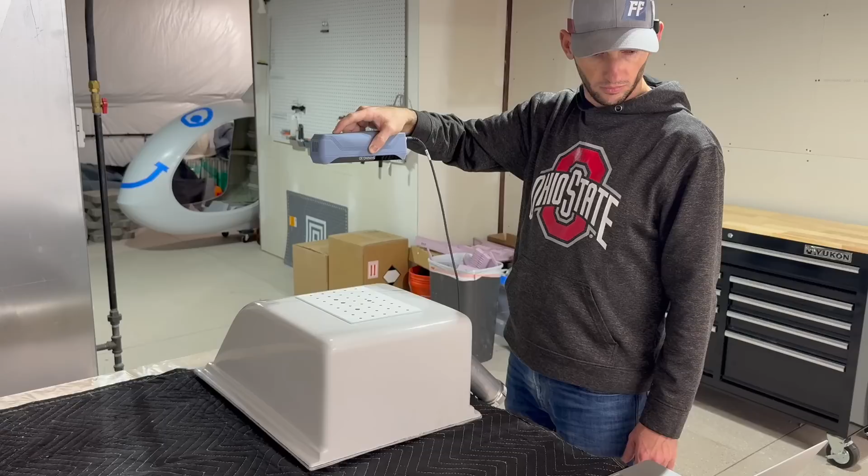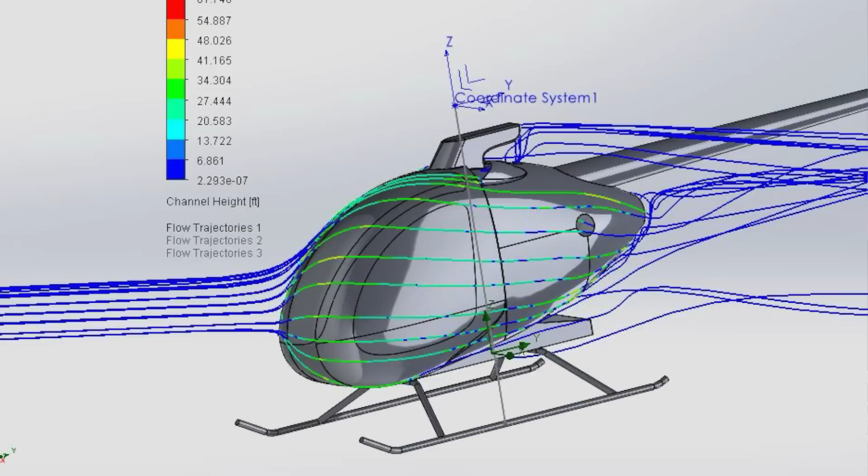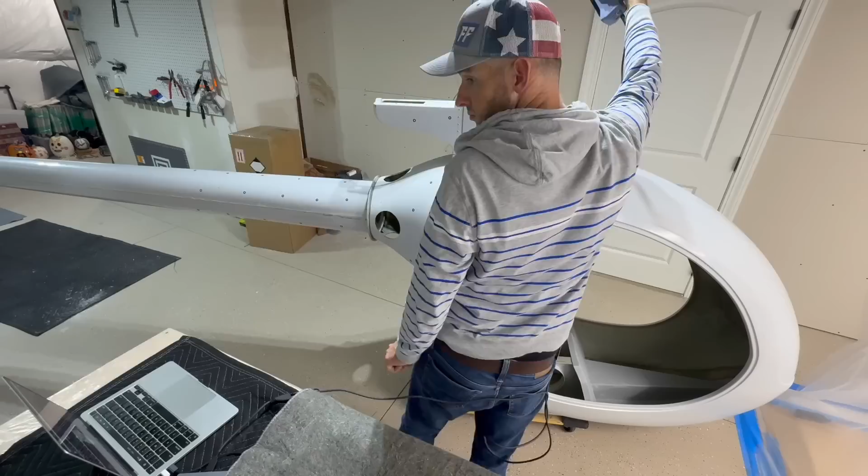Today's video is going to be a little bit different than you're used to. I have so many applications where I have parts in this physical world where I need to get them into CAD so I can do things like CFD or design new molds and parts for this helicopter. But until I had a 3D scanner, there was basically no way to do that. Now that I've had some experience with this scanner, I thought it would be extremely useful to put together a tutorial so you guys could see what it actually takes to use one of these things and how to go from the physical world through a point cloud and into CAD to design a part.

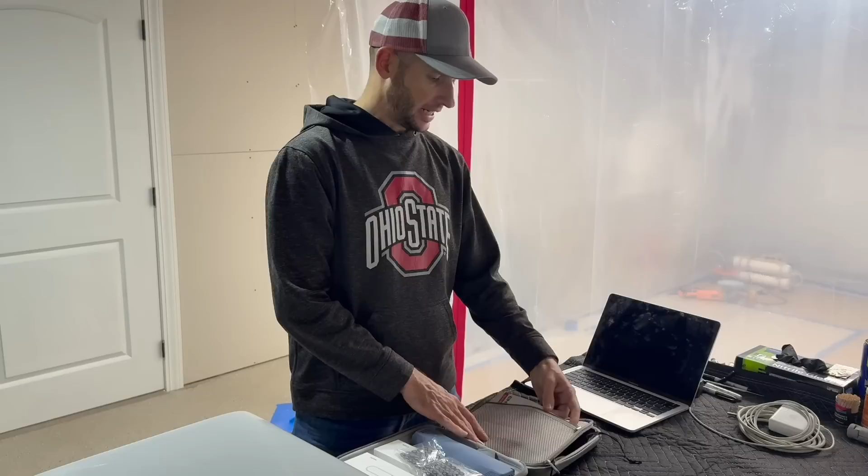The 3D scanner we're going to be using to get this part into CAD is called the Einstar by Shining 3D. It comes to you in a nice carrying case. Inside you get a power adapter, a cable to connect it to the computer and then to power, and obviously your scanner, which is here. Inside the pouch, you get some tracking dots, which is nice. There's a quick start guide as well to give you some basic pointers. And then behind here, we have a calibration plate, which we'll get into a little later.

This scanner uses infrared technology for scanning, so there's a couple advantages and disadvantages to that. It isn't quite as accurate as the laser type, though it does work in a full array of light because the infrared isn't as affected by other ambient light. So you can use it indoor and outdoor, which is a big plus. This particular scanner has raving reviews all over the internet for being able to scan larger objects, which is what we're doing here. It seems to be very user-friendly without needing a whole bunch of tracking dots and minimal setup. The software also seems to be the best for this grade of scanner. So that's basically the reasons why I chose it.

The disadvantage though is the software is computation heavy, so we're going to be using a MacBook Pro. It has the M1 chip. This is what they're calling the lower end of what you want. I think it has 16 gigs of RAM. You ideally would have like the M1 Pro chip or an M2 with 32 gigs of RAM, but so far this has done okay. I have run into a couple issues which we'll go over.

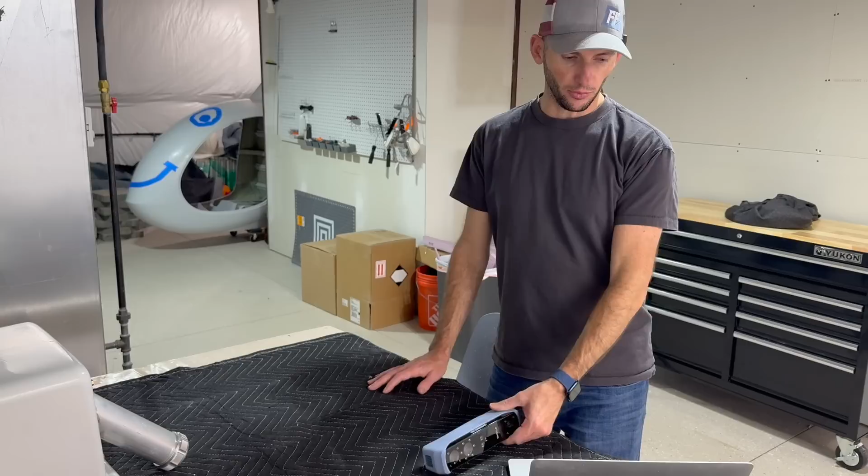For the most part we've done just fine. All right, so this is the Shining 3D software. When you pull it up, it shows you a couple things. The first is that the device is connected. If it is not connected, make sure you plug it in and then re-click the button and it should register that the device is there.

After that, it's going to check to see if your calibration is there. If the data is not there or if it's expired - I don't know what the actual timeline is, but I think it's like a week or so - if it hasn't been calibrated within that time, it'll give you an exclamation point, in which case you should probably go redo it again. In this case, it is calibrated, but I want to share with you guys that calibration process, so we're going to go into that.

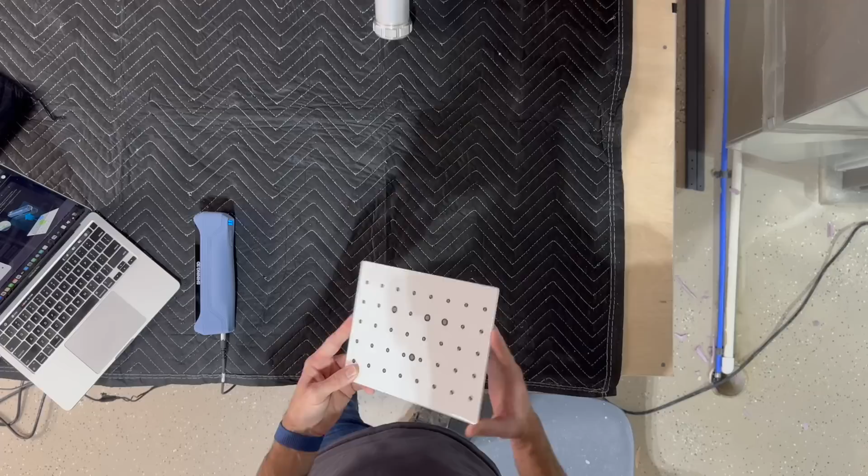What you're going to do is get your calibration plate out. You're going to orient it on a flat surface with the dots in the same manner that is displayed on the screen. I also found out that if you don't put this on a flat surface, weird things happen.

Something tells me I'm not doing this right. So if something isn't going right, make sure you are on a big flat surface.

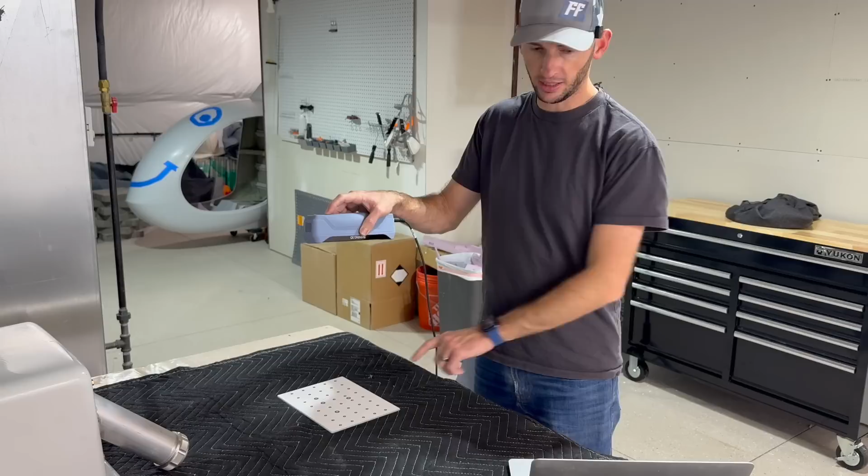After that, you pick up your scanner. It's going to step you through a few things. You're going to click the play button on your scanner and point it directly at the part straight up from the calibration plate. It should display a blue dot and a gray dot. You need to make sure that blue dot is in the gray dot and you get a green check mark. From there, the boxes on the right are your height.

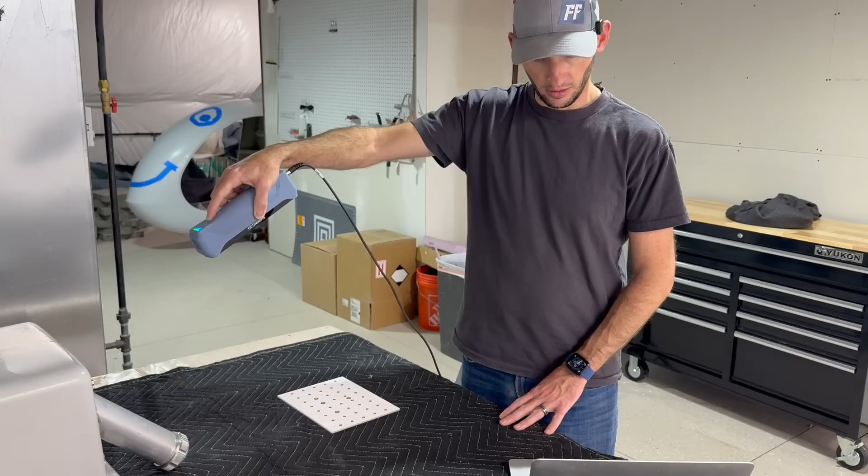So you'll move down and up until all of those boxes are checked. It doesn't matter the sequence that you do that. The next step is to do the same thing, but at a 30-degree angle tilted forward. Hit the play button again, get the circles lined up, and then raise and lower until all of those are green.

Do the same thing going back and to the right, and then finally to the left.

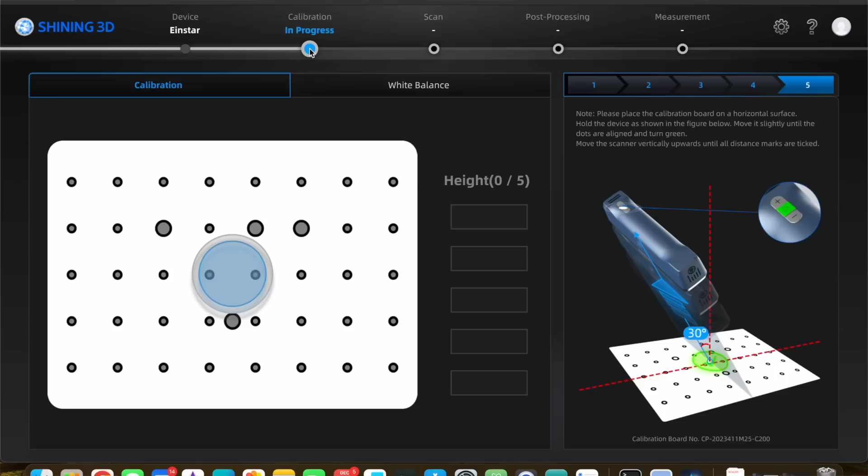After that, it will tell you it's been calibrated successfully, and you're going to check your white balance. White balance is just looking for one location, in the center and then at that height. Once that's done, you are good to go.

And that brings us to the actual project. So here we're going to click New Project Group. We're going to name this Aux Tank. Confirm. There was an error for storage, but I know we have plenty.

And in here we have a few options. You have portrait, which we're clearly not doing. We're doing an object - this is a medium or large object. It gives you some rough dimensions. Anything smaller than 200 by 200 by 200, they say do something smaller.

And then the mode of alignment - this is pretty important. This particular scanner does a really good job at just recognizing features. There's some things that can affect that, such as really shiny objects, which this kind of is. We're going to go just as is to see how this works, but we may have to make some changes in the future.

You can also put markers on here. We do not want to use markers because those are a pain. That's those other things you can do to make this more scannable. We're not looking for texture. And we don't want to use global markers, which would be something that you would put like on the ground around it or on a turntable or something of that sort. So right now we're just using features.

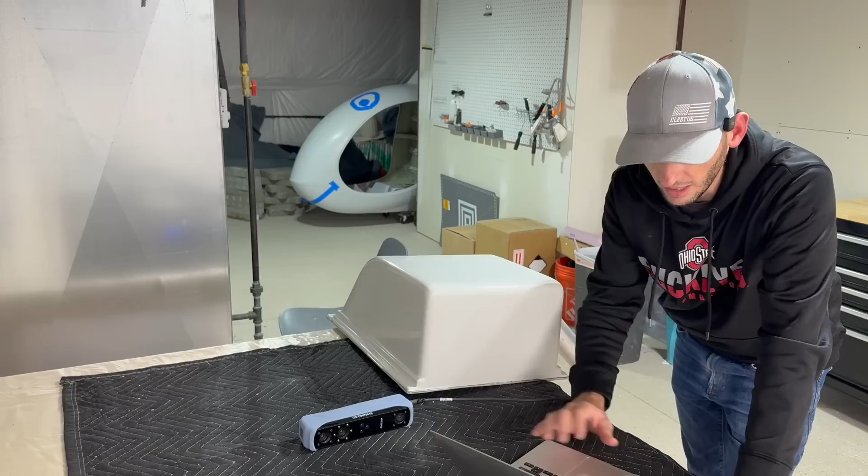Resolution, we're going to stick to 1 millimeter. You could go smaller, but I don't need that type of resolution for this. It's just going to mean that the file's bigger and it needs more computing. So we're just going to use 1 millimeter. Texture scan, we're not using the color cameras on this, so no texture scan either.

Confirm, it will open up your new project. And then let's talk through some of these. So you have brightness that controls the intensity of the IR lights, which ultimately scans your part.

If it's too bright, it'll blow the sensor out and you won't get good data. So lean on less brightness than more. Your working distance is next - this is how close or far the scanner is going to like to be away from your object. I'm going to leave that as default.

We have plane detection. This tries to detect a plane that's underneath your part. I prefer just to leave it off because we can detect a plane later. Then that is also coupled.

We'll jump down to auto cutting plane. That's going to attempt to get rid of any scan data below that plane. Once again, I'd just rather choose in post. I think it's better that way anyways.

We are going to turn data quality indicator on. This changes the color of the scan on the screen from red to green if it thinks that the data is good. So we're going to go ahead and use that as an aid. And then once again, you have this adjust point distance. From there, it's onto the part. So real quick about the part.

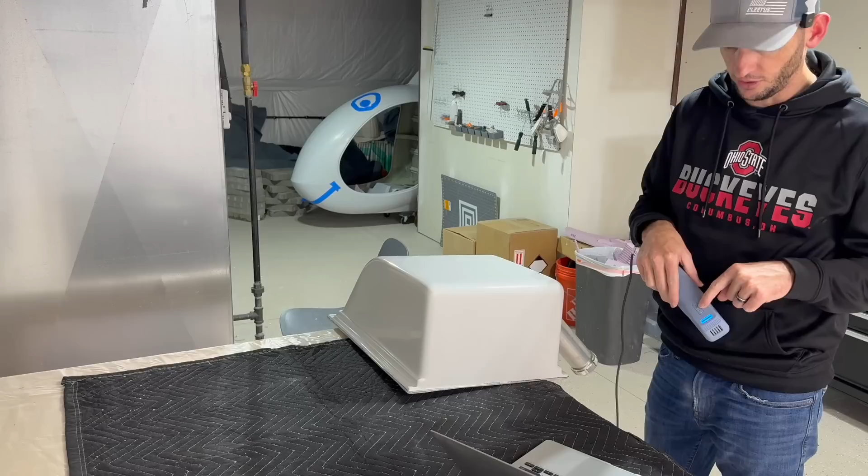So this is the scanner. There's a play button to start and stop your scan, and there's also a plus and minus. This does two things: one, it changes the intensity of your IR lights, so you can adjust that right on the scanner, and it also has a series of lights. So we'll get into this now.

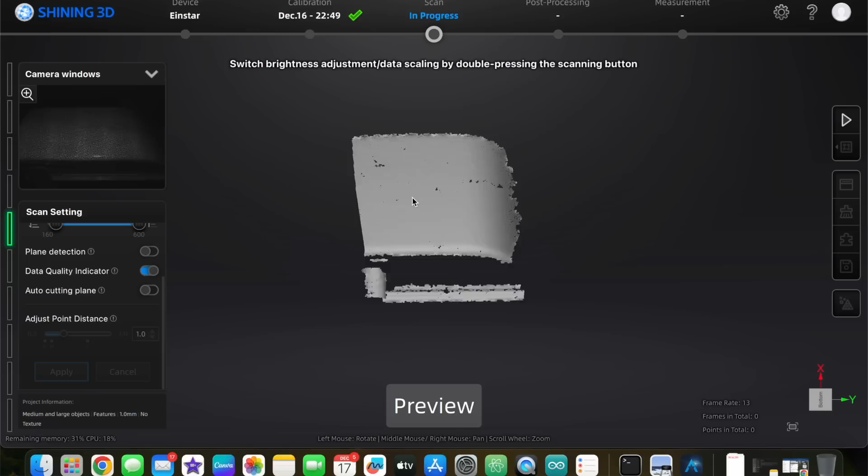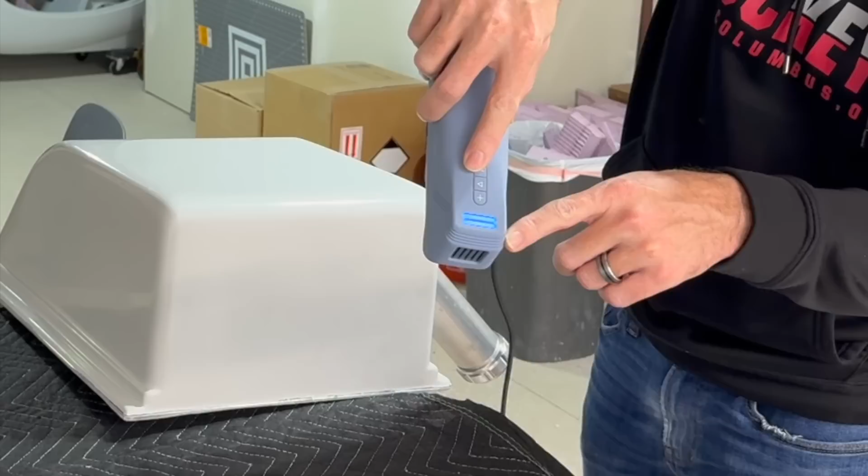The first time you click play, it goes into a preview. You can see on the left side of the screen there's a bar that goes from blue, green, then yellow and red. That is your scanning distance, and it gets mimicked again on this top light. If you're too close, it goes red, and as you get further away, it goes green and then eventually blue. So it's really nice that you can just stare at your scanner instead of having to stare at your screen, and all that data is there.

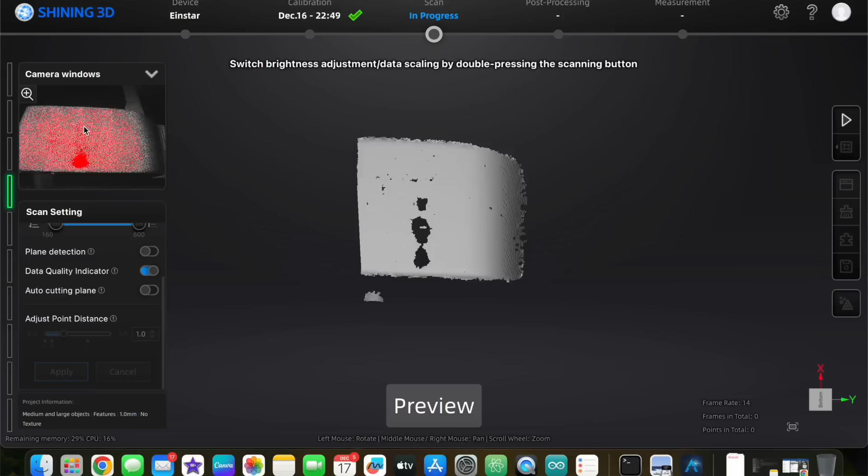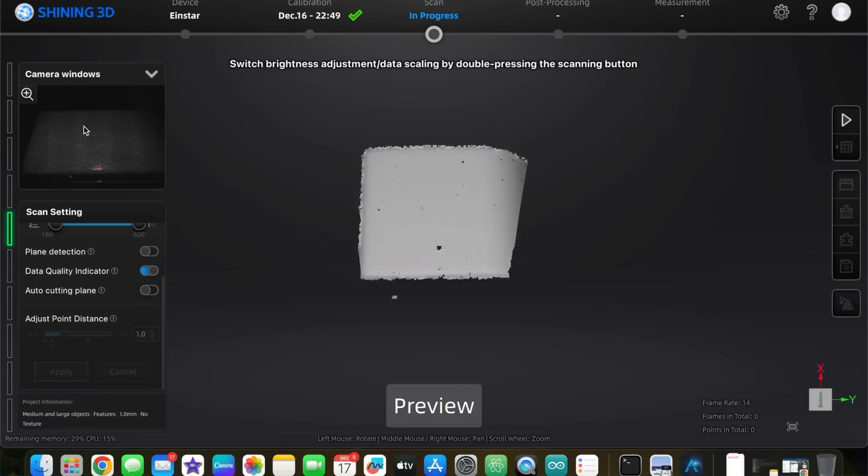The plus and minus button I mentioned controls the intensity of the light. I'm going to blow it out really quick so you can see what that looks like. This screen on the left is what I'm looking at. You can see all that red blowing out the sensor, and in the middle it just can't scan that surface because it's so blown out. So you take that back, and the further I dial this down, actually the better the scan gets, to a point, and then it gets a little frayed at the edges. So there's a happy balance—they say you want just a little bit of red on the screen, and I'm going to go with that.

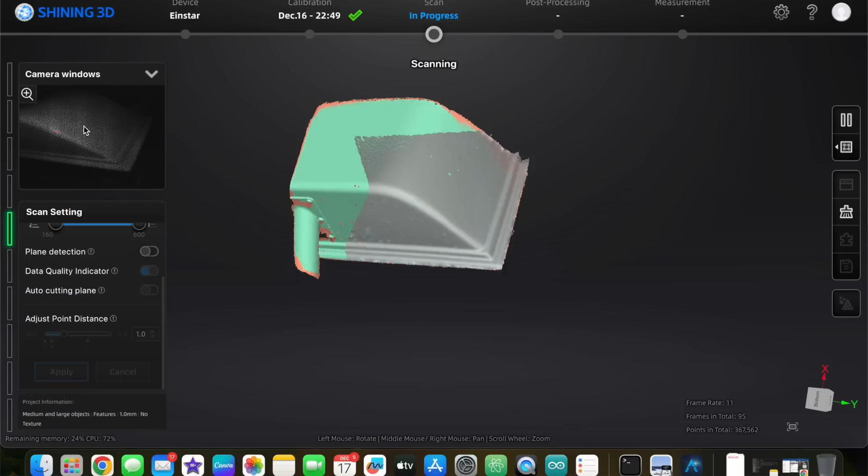That seems good. All that's left to do is hit play again, and we'll start scanning. So I'll go ahead and hit play. This is going to start to generate a scan. You can see it going from red to green the more it gets confident in that scan. You want to go slow, but you don't have to go too slow. The scanner does not like flat objects, so as long as that gray scanning area is recognizing some edges, everything should be okay.

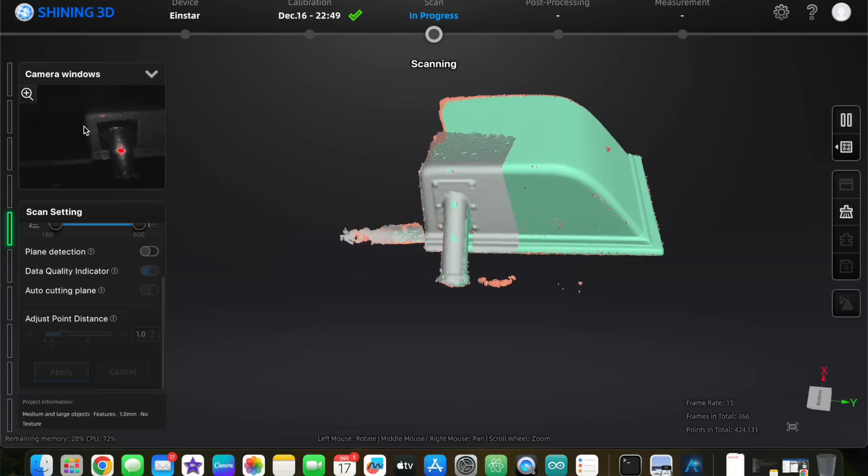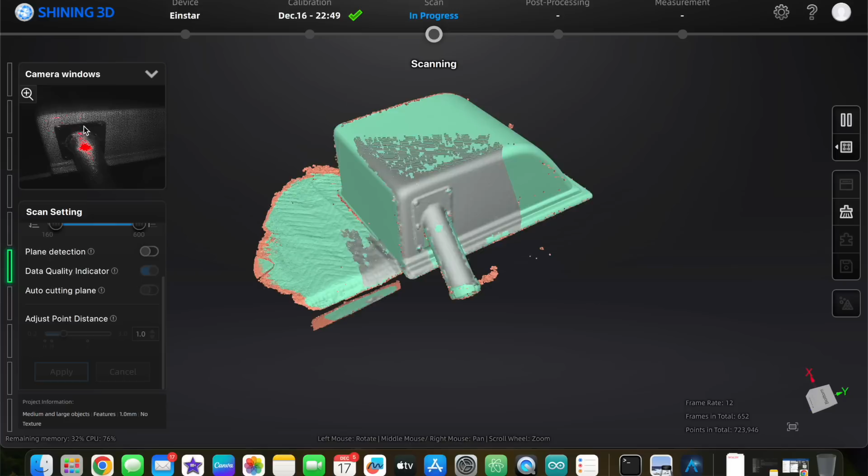When I was scanning the helicopter, it's such a big, flat, softly curved object, the tracking was just a disaster—it just could not keep up. So we're going to get the bulk of this part here, and then I'm going to show you how I plan to get some of the other sides, which is pretty trick and super nice. I'm just going back one more time. I wanted to make sure I get this corner back here, and we're going to come back and fill that in in a little bit.

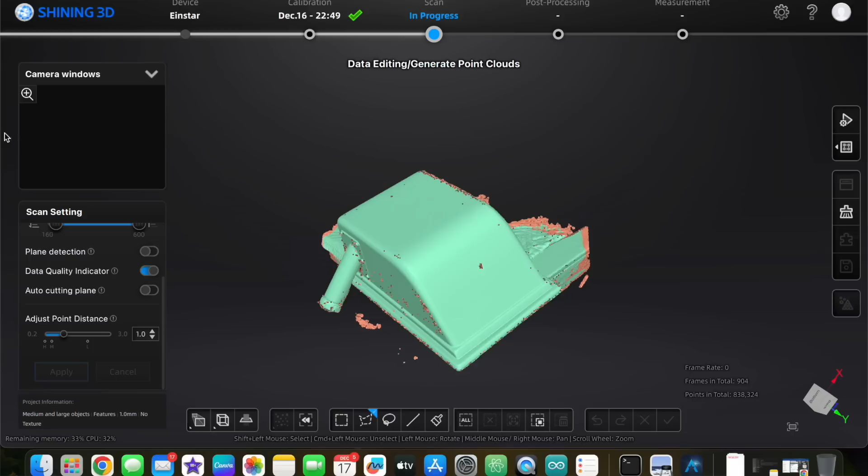So that's probably good enough, so I'm going to hit pause. This is the scan we have so far—pretty good, pretty happy with it, but there's a location, let's see if I can get you in there. It was caught by the shadow—see, we're missing all this data, and that's because I never got under there. It was a shadow, and it could never be seen.

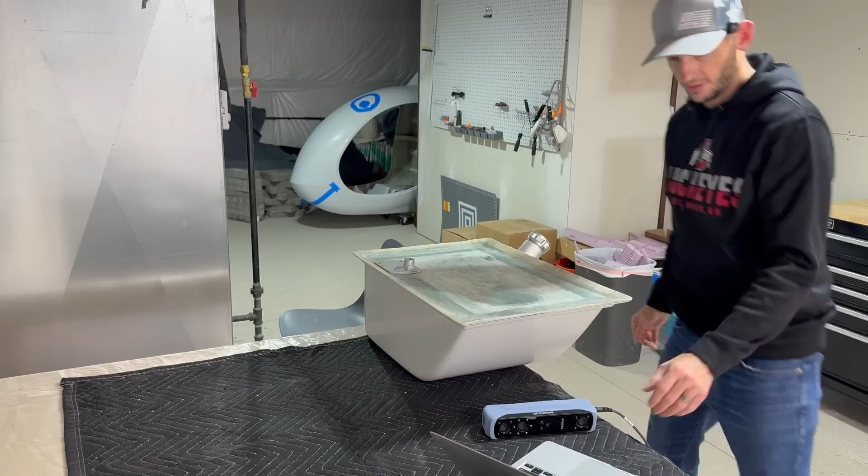So what we're going to do, to make this easy on ourselves, is actually just flip this whole thing over, and then use the software to recognize where the scan left off and start again. I'm going to hit play, and it's going to preview—it's going to look for the section that it's already scanned, and look at that, it's already picked up where it knows the geometry should be. This is going to allow us to comfortably scan the other side. So I'm going to hit play, and then rotate around to the top of this part.

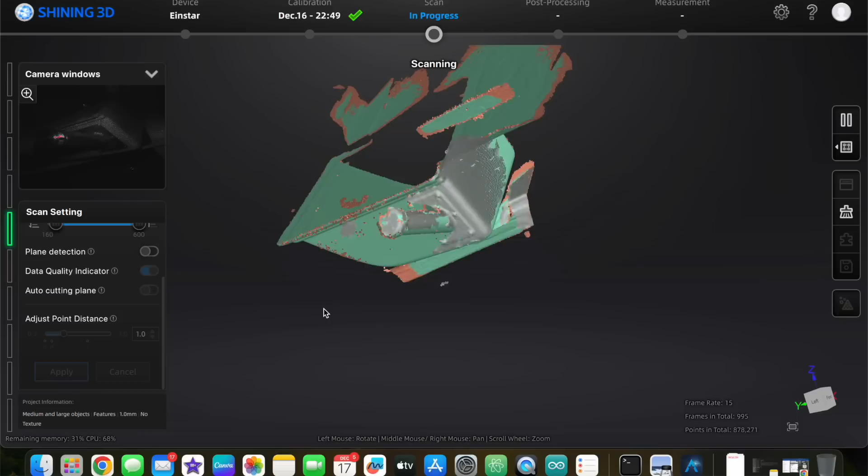And we'll hit pause again. And once you've finished scanning your part, there's a few tools you can use to edit the overall scan before it goes into post-processing. The first of which is just a rectangle tool. You use it by clicking Shift and then dragging with your mouse. As you can see, it creates a rectangle.

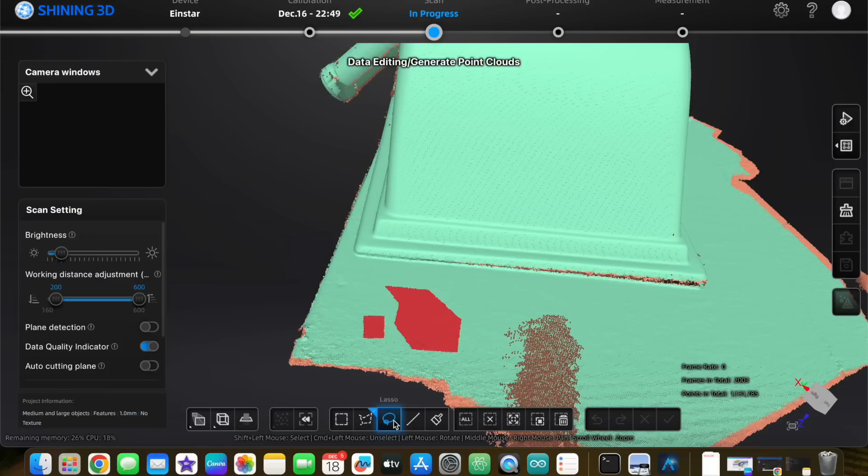The next is a polygon, so it makes as many lines as you click with your mouse. The third is a lasso tool. Once again, self-explanatory. And the final is a line tool. This actually creates a line and splits the whole part. You also have a paintbrush tool, and once again, you can just draw like you have a paintbrush.

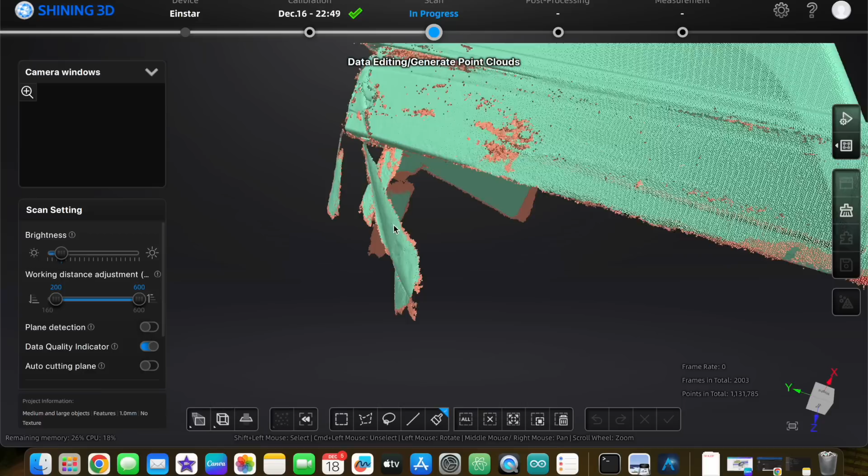It is important to note, though, that if you use any of these tools, it does not stop at the first surface. So you'll see here, I'll put a little shape on this surface that's sticking out, and then you can see now that that selection transfers all the way through to all the surfaces in that part.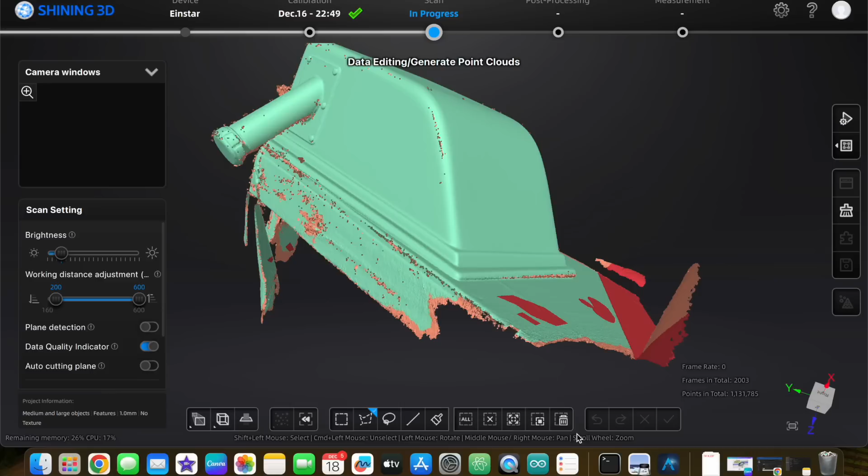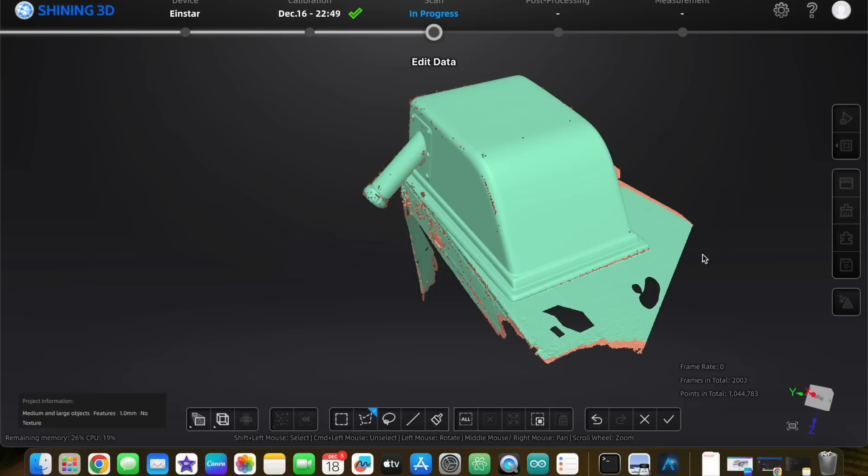From there, you have a few more helpful tools at your disposal. We'll go through each one individually, but we'll start with just delete, pretty self-explanatory. The next two you'll use together are called selected domain and invert. Selected domain will select anything that touches the original area that was previously selected. And then invert will then select anything that is outside of that domain. This is especially useful for deleting any of those stray objects or floating things in space.

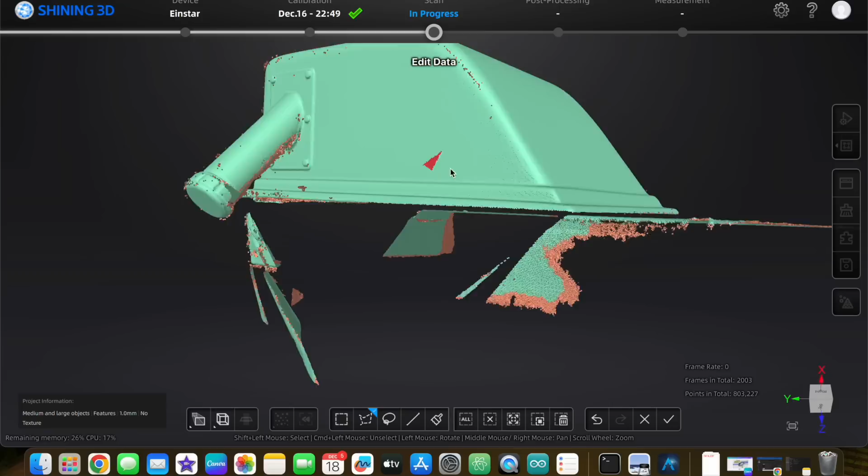From here on out, we'll be using the polygon tool. I'm just going to run around the entire perimeter of the part and get rid of any of that extra scan data from the table. And finally, we'll use, once again, the selected domain, invert, and then delete to get anything that is no longer touching my part. Clicking the check mark applies the edit, and then we'll wait for it to go into post-processing.

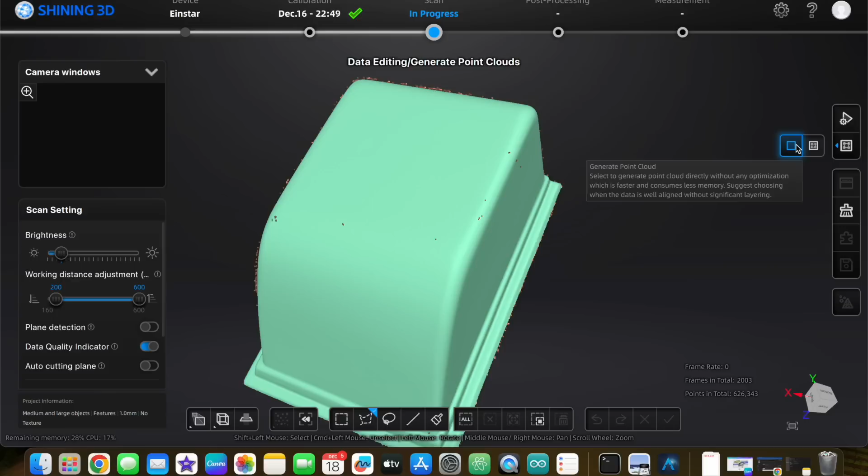And now you can start actually creating your mesh. There's two options here. One, it's just going to create a mesh, assuming that it's a pretty good scan. The second is if you have multiple projects that have been combined together, which apparently is a thing you can do, it will try and sort that out and create a mesh from all those individual projects. I have never been successful in combining projects, and so I don't know, maybe it's me, but I wouldn't suggest you try.

I've also gotten this warning every single time I've tried to do a scan. It's basically telling me there's not enough memory to do it and that I should go and rewind the process and make my scan data smaller. Long story short, it's worked every time. The wording here is also confusing. You can either confirm that it's not going to work, or you can continue that it's not going to work. So make sure you click continue.

This process could take a little while. It usually gets to 41% and just hangs. So just get up and leave for a little while and let it do what it's got to do. The couple of times that it has not worked for me, it's thrown an error code, but these were all on attempts that I was trying to combine projects. And since I've stopped trying to do that, everything has worked just fine.

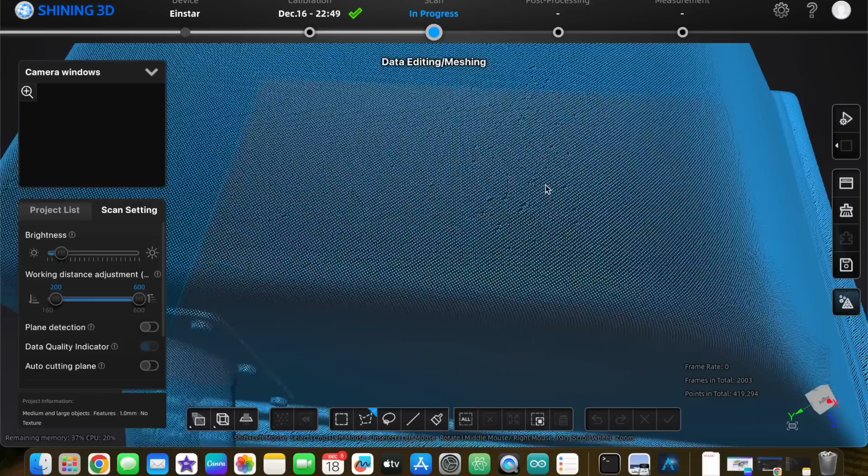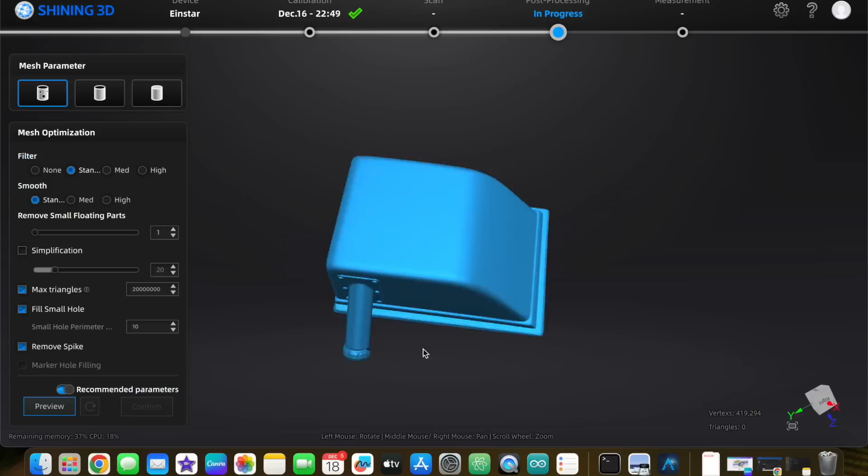And the last thing to do here is to mesh your model. And this gives you a few options. You can try to create an airtight or watertight model. You can do things like assigning the max triangle size. You can try to eliminate floating particles. Long story short, from what I've heard, it's best to just use the recommended settings. And for all of the projects that I have done, that's been what's worked the best. So we're going to do that and just stick with the recommended settings.

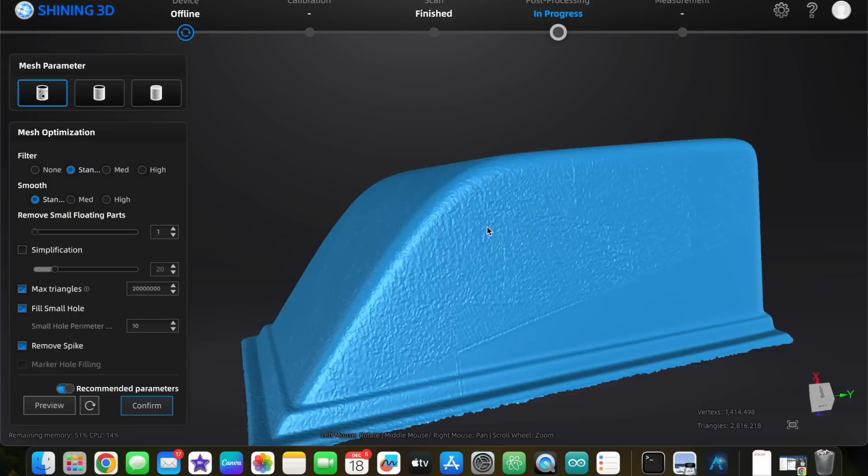The result ended up being a bit of a surprise for me. You can see that there's some noisy data and some hard lines and then some clean data. This was weird because with the helicopter scan I did, this never happened. The only thing I can come up with is that it was a shiny surface and the infrared lights just couldn't do a good job at measuring them.

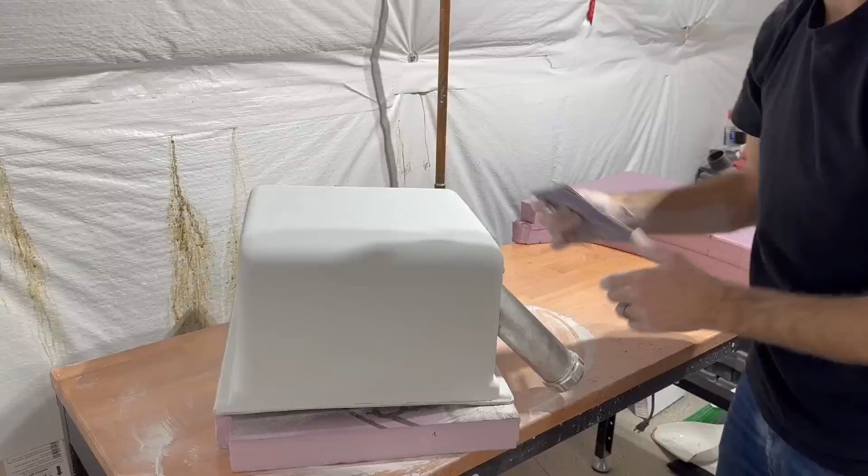The easiest way to test this theory was just to go sand the whole surface down. I'd have to do this anyways, so pretty good excuse. All right, so I've sanded all the surfaces back down to like a matte finish, nothing crazy. Let's test this theory out. I have no idea if it's going to work. We're about to find out.

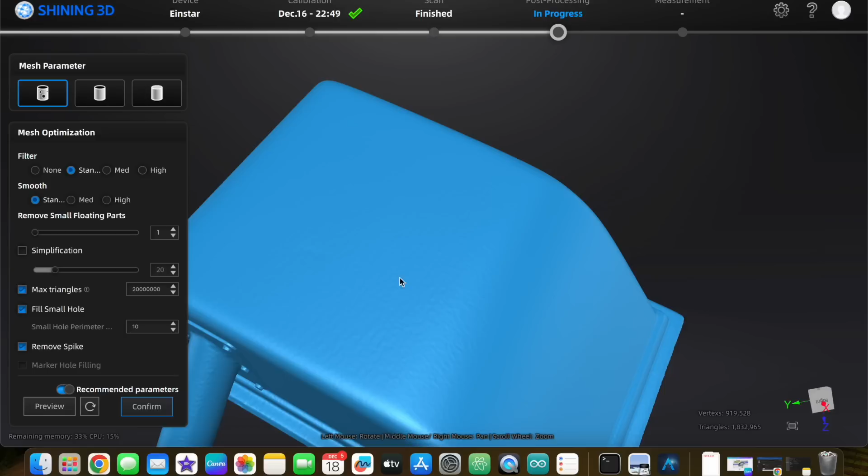And here we have it. The only thing I changed from the last scan to this one was the surface finish. You can see, obviously much better. There are some weird ripples going down the side. I can only assume that that might just be from the resolution that I selected, it being 1mm. This is plenty good for what I'm trying to do. I just needed a rough shape so that I can create a model. So for me, this is fine.

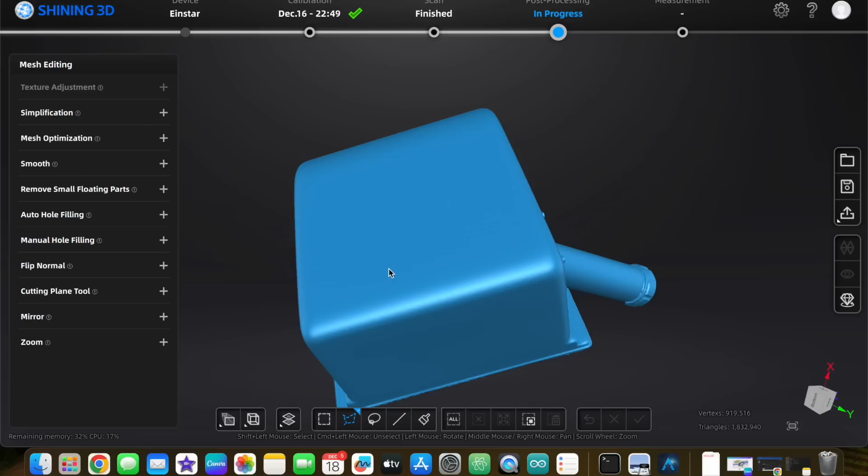And the last thing I want to share with you guys is simplification. This file starts out at almost 2 million polygons and nearly 90 megabytes of an STL file. That's just massive. Shoot for something around the 200,000-ish polygon number. That's going to be plenty sufficient for what you're trying to use, and it'll be much easier to work with in any of the CAD programs that you're using.

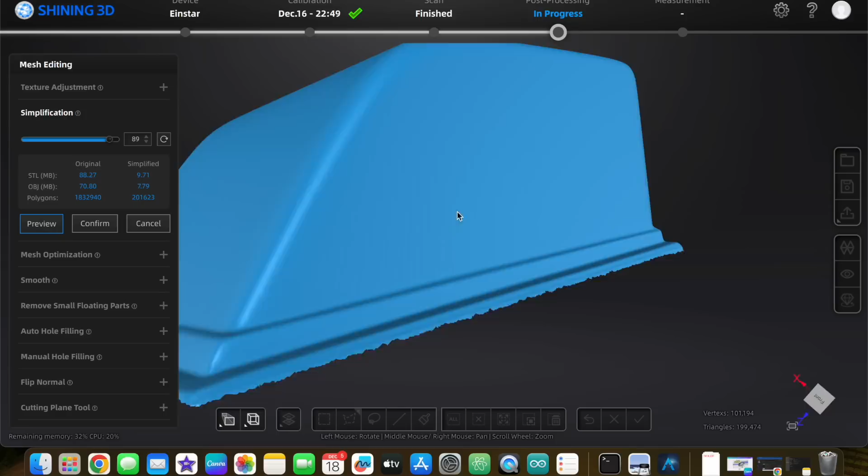And that's it. You have a perfectly scanned model. You can save it as an STL, a 3MF, a STEP, really anything that suits your CAD program most. And once you're done with that, go ahead and import it in, and you can start creating off a model that you scanned from real life.

All right, we're back up in the office so I can hopefully share with you guys how to get that scan data into the computer and convert it into something that you can actually use. But before we get into all that, I really need to explain what you can use this stuff for and what you can't. So we'll start with what you can.

If you're trying to use this scan data and make, for example, a 3D printed model, that slicing software probably accepts STLs. And you can import that model and basically print what you scanned. Now, there's a caveat to that. It does need to be watertight, so you need to be a little bit more careful and do some more post-processing to make sure that that whole model is watertight. But that is basically something that you can do, scan to 3D print, and you're fine.

I guess you could technically do something similar for like making a mold. You could take a 3MF or an STL file and boolean out a section from a block, and then you have a mold, and you could go that route. So if you're not planning to alter the scan data, you can get by with it.

So what can't you do? Basically what I want to do with it. You can't really manipulate an STL file. It's a point cloud. It's got a whole bunch of polygons. You can't match the contours of surfaces. It's just trash on the modeling side. And so the only way to use your scan is to basically put it into CAD and use it as a template to start designing your own new CAD around it.

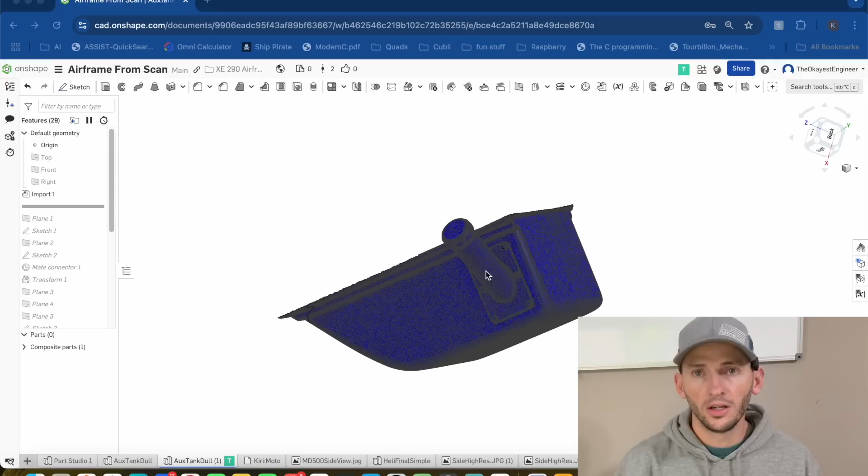So you can see now that I've imported the STL file into, I'm using Onshape, but into a CAD software. When it comes in, once again, it's all those little polygons, and so it leaves all the lines, and that's usually visible in CAD software. I like to remove those lines so it's just shaded without the lines, and it gives more of a uniform color, and it's just easier to look at.

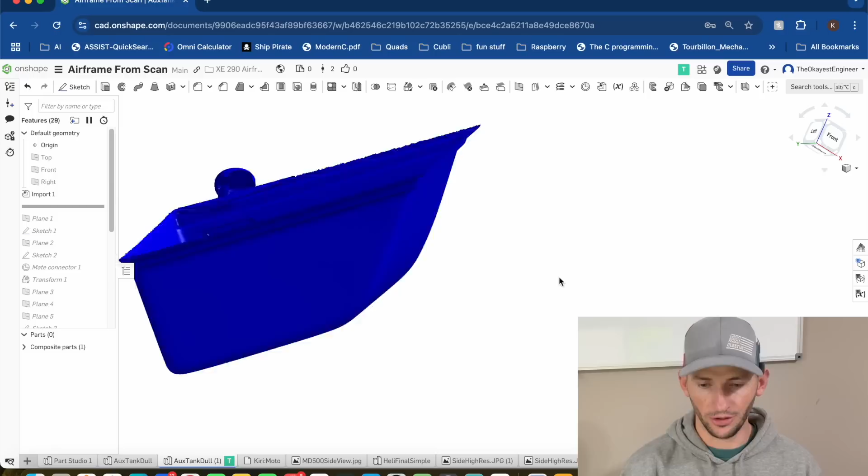The next thing you need to do once you have the model in is you need to manipulate it back over to a coordinate system that makes sense to CAD. And so that's what you're going to see me doing here.

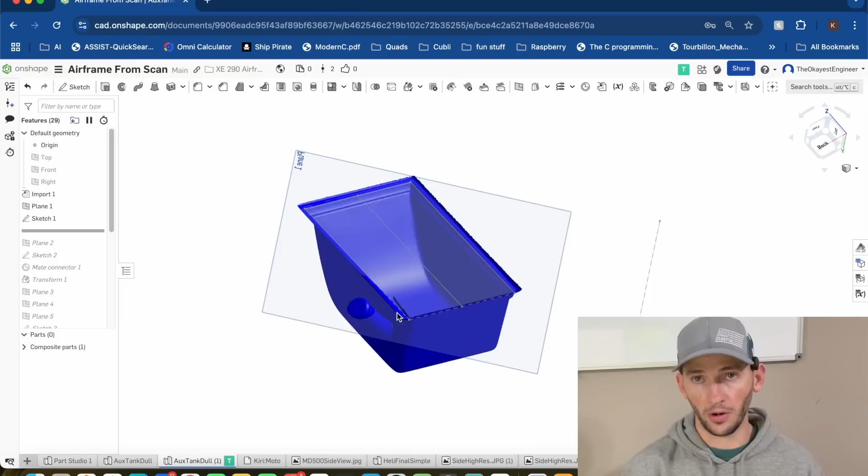I'm just applying some planes and sketching in some lines that make sense to the part, and basically creating a coordinate system for the part that I can then translate over to the coordinate system of the CAD software. And so it may look a little messy and does look a little weird, but basically I just need two perpendicular lines that I can call two primary axes, and then that will define the coordinate system that I'll then use from there on out.

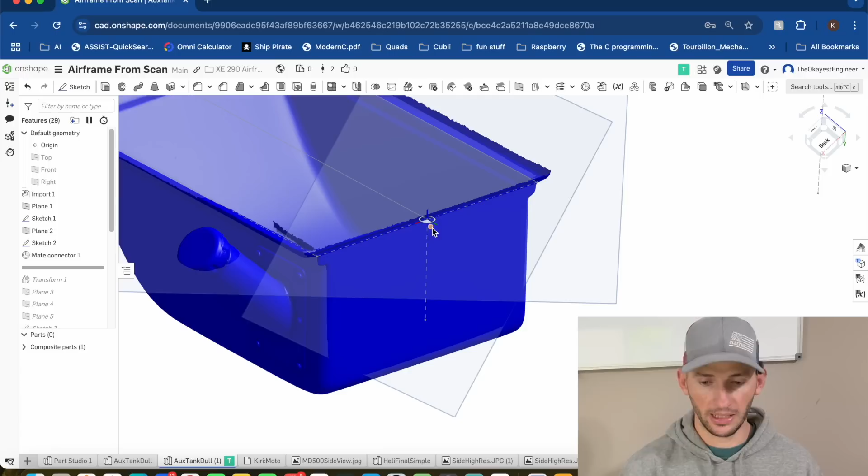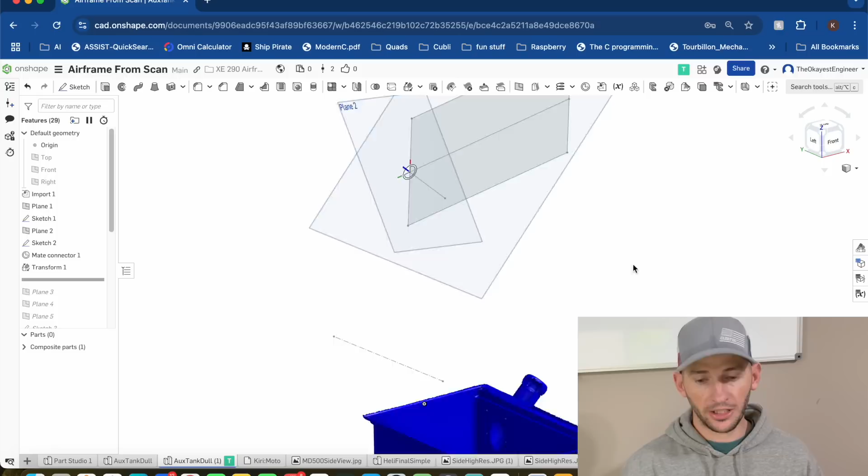So once I've got the coordinate system landed there, I then once again translate it over to the CAD coordinate system, and then boom, I've got the part spatially oriented in a way that makes sense and that I can later use in an assembly and easily mate those parts together. With the coordinate system now defined, it's super easy just to create planes and sketches to create your part. I'm not going to go into all that. There's plenty better tutorials out there on YouTube, so please just go do a search for that if you're interested.

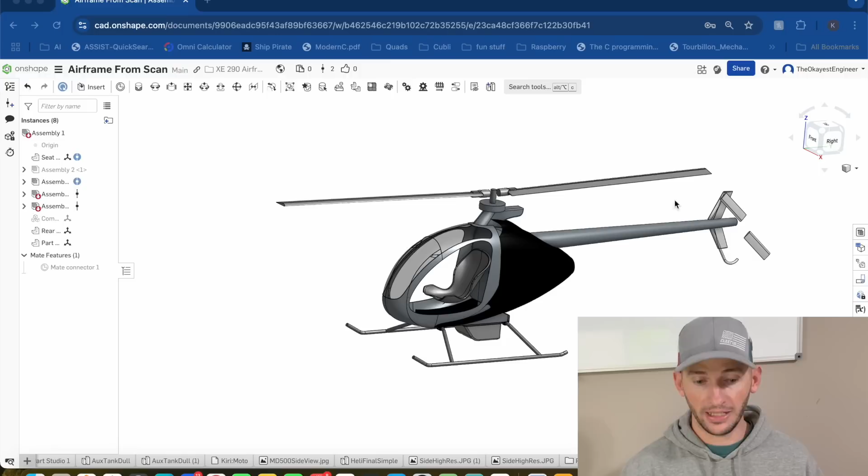But basically, I just duplicated the part using the scan data as a template, and this is what the end result is. It's not perfect. I don't need it to be. I just need it to be close. I need to be able to create some parts off of this, and so that'll all get hand feathered in the same way that I did the cowling. So it just needs to be close.

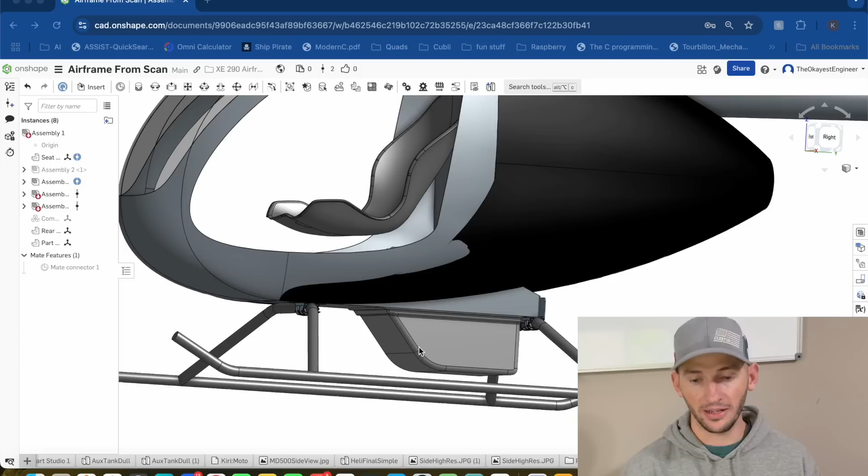The plan is in the future, I need two landing lights on the front of this helicopter, and it only made sense to me to put these landing lights in a little cowling or box right ahead of the auxiliary tank, which is what I scanned. And so I'll be designing that, eventually making another plug, mold, and a carbon fiber part. So I hope you stick around and check those out for another project in the future.

And with that, I want to leave you guys with some final thoughts and who I think 3D scanners are for and who they're not for. Overall, the entire process was okay. It was a little clunky though. It definitely wasn't super straightforward and needed a whole lot of basically figuring it out to get it to work. I equate it kind of to the 3D printers of the world, where, yeah, you can print something, but keeping that printer going and having good success takes effort and knowledge and learning, and you have to want to get it done rather than just clicking print and receiving a part.

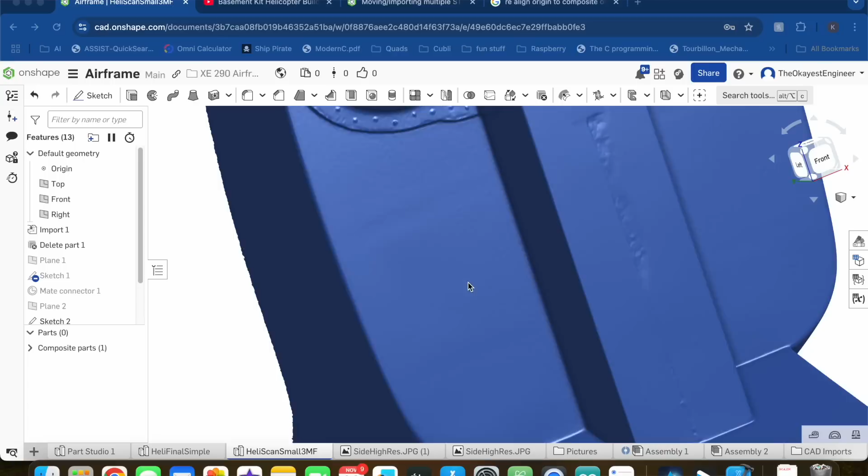Same is true for this. If you're willing to work through all the nuances, you can absolutely get a phenomenal scan. I mean, you saw that with the auxiliary tank. I actually got a great scan of the actual helicopter. And so the end result is good. It's just not something that you're going to pick up, scan, and be done.

The other part that I mentioned briefly before, it depends on what you're going to use this thing for. If you're just going to scan fun objects and try to get an STL to put into a printer and print something, sure. But if you're trying to reverse engineer something or create something, the whole transition from scanning to CAD is cumbersome, to say the least. In my case, there was no other way. And I'm skilled enough in CAD to be able to figure it out, and I'm willing and actually like that challenge.

So if you're willing to jump into it and know that it's going to be a struggle, absolutely it's for you. If you're planning to just pick this thing up and hoping you can scan something and have it work first try, I caution you, don't jump into this. It's not just a plug and play type of thing that you're going to enjoy and do on first try.